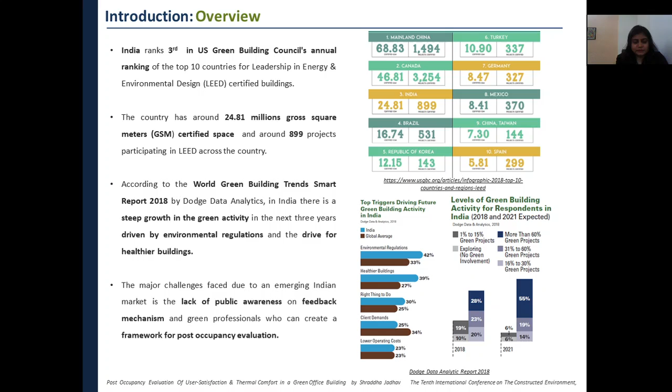across the country. According to World Green Building Trends SmartMarket Report 2018 by Dodge Data Analytics, it is seen that there will be a steep growth in green activity in the next coming 3 years in India, which will be driven by environmental regulations and drive for healthier buildings. The major challenges faced due to emerging Indian market is a lack of public awareness on feedback mechanism and green professionals who can create a framework for post-occupancy evaluation.

Coming to the introduction, post-occupancy evaluation. Post-occupancy evaluation is a process of systematically evaluating the performance of buildings after they have been built and occupied for at least 1 year. It is used to gauge fitness for the purpose and how a building is performing after construction from occupants' perspective. So, there are 3 levels of post-occupancy evaluation.

One is indicative level, and the time required is only 1 week, and it can be done through a quick walkthrough. Also, it can be done to just highlight the occupancy issues. The second is the investigative level. The time required is 1 to 3 months depending upon the level of assessment. It can be done through qualitative and quantitative based approach.

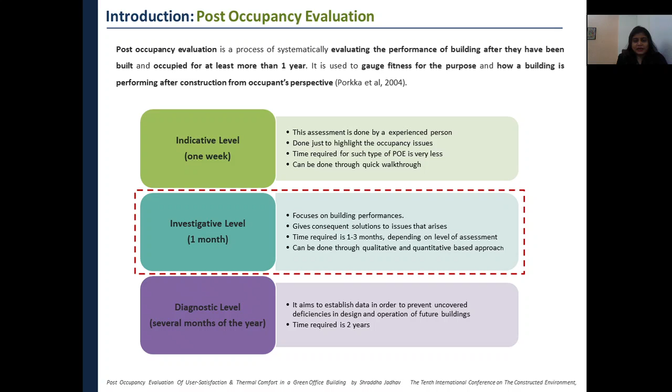The third is the diagnostic level. The time required is 2 years and it aims at establishing data in order to prevent uncovered deficiencies in design and operation of future buildings. The investigative level was followed for this research. The time taken was around 3 months and a qualitative and quantitative based approach was followed.

Coming to project case study. The project case study is an IT campus located in Pune city, which is 150 kilometers from Mumbai in India. The IT campus is located far away from the main highway at an extreme end. It has hills on the north and the northeast side and open area on the south side. The complex is divided into the following areas: development block, training center, ERC guest house, cafeteria, clubhouse and amphitheater.

Post-occupancy evaluation was done for the development block building only. The building analyzed is a LEED India EBOM Platinum rated office building, and it consists of 14 floors and has workstations and service areas. All the floors are typical, only breakout spaces on alternate floors are different. Alternate floors are different.

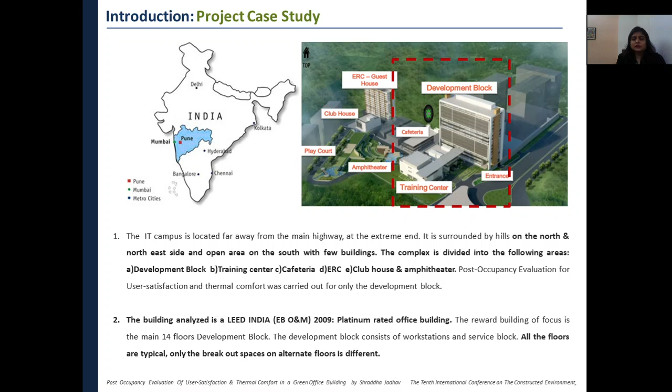Coming to methodology, tools for measurement and evaluation. The tools for measurement were digital meter tool, which was used to measure temperature, wind speed and daylight values on site. The globe thermometer tool was used to measure the mean radiant temperature on site.

Tool for evaluation. CBE thermal comfort tool was used to evaluate the PMV and PPD levels. SPSS analytics software was used to analyze the qualitative parameters. PMV range scale was used to understand the PMV in that space. And vertical temperature difference, operative temperature and percentage of dissatisfied due to local discomfort was followed from ASHRAE 55 2010.

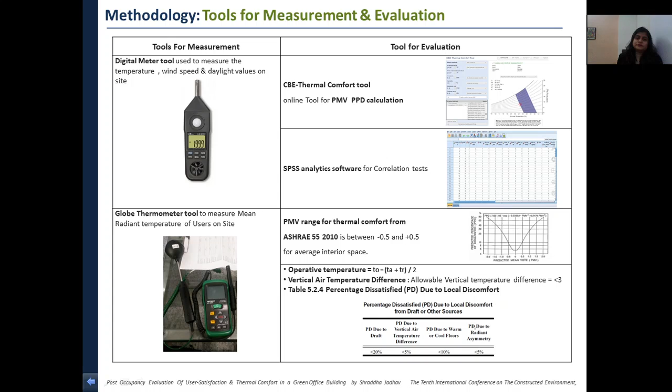Coming to sampling techniques and detail. Sampling was done such that there were some restrictive issues in the building since it was an IT building. So the building was divided into 3 levels, that is lower level, intermediate level and higher level. From the lower level, 2nd floor was selected. From the intermediate level, 6th floor was selected, and from the higher level, 11th floor was selected. The floor plate was typical on all the floors, only the breakout spaces were different.

So each floor plate was divided using stratified sampling based on orientation. So it was divided into ODC1, ODC2, ODC3 and ODC4. Random samples were selected from these ODCs, based on location: near to the window, between the desk and near to the dead external wall.

Sampling details. Survey questionnaires were distributed amongst these random samples in each ODC. Mean radiant temperature of these samples was measured for two timings, that is in the morning and the afternoon, at head and ankle level. Daylight levels were measured with the help of digital lux meter in these ODCs.

Research instruments and questionnaire survey. As mentioned earlier, research instruments were a digital meter tool, the survey questionnaires, and the observational survey. The survey questionnaire consisted of close-ended multiple choice questions limited to only one answer. In total, 100 samples were selected from all the three floors for analysis.

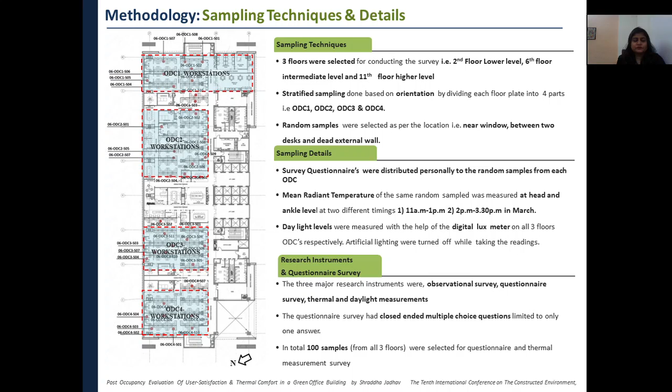Analysis of user building relationship. So, as you see in the chart, this pie chart tells about the space usage by occupants for breaks. So 30% of the occupants went to the breakout space on the floor level itself, 20% went to the landscape areas, 40% went to the cafeteria, and 10% went outside the building.

So if the breakout space in the building were designed in a better way, integrating with nature, then there was a probability that 50% of the occupants would have gone only in the building itself and would have avoided going outside the building. So the usage pattern helps us to understand how breakout spaces should be designed so that they are more integrated with nature, as these spaces enhance health and well-being and have an effect on the productivity of the occupants.

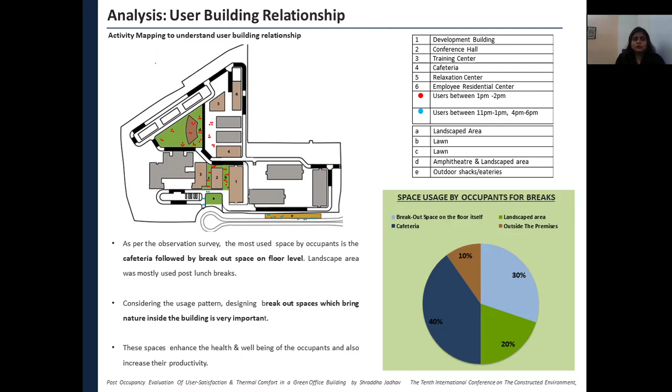Coming to user satisfaction, the survey questionnaire which was prepared had a section of parameters related to user satisfaction. The questions were asked on these parameters. So the first question was, how would you rate the daylight level in your workspace? The first parameter considered here was daylight. So 80% of the occupants said that the daylight levels are satisfying, whereas 20% said they are dissatisfied with the daylight levels.

So when the daylight levels were measured, it was seen that in the exterior areas near the exterior glazing on the north side, the daylight levels were more than 600, whereas in the interior core areas, the daylight level was within 100 to 200. So daylight levels majorly depend upon the building orientation and the window configuration.

So as seen in the floor, the interior core areas get less daylight because they have no exterior facade close by, and the building planning is done in such a way that only one side of the building gets more daylight. However, the occupants are satisfied with the daylight conditions, and the building could justify the requirements of daylight levels in the workspace. So the daylight levels are well as per the requirement.

Coming to the next question, that is artificial lighting around your workspace. 80% of the people were satisfied with the artificial lighting in their workspace, but a few were dissatisfied because of no user control on the artificial lighting in their space. The third is, how would you rate the overall interior design of your workspace? So around 40% of the people were satisfied, whereas 40 to 50% were dissatisfied with the interior design. The reason being the interior planning was a cubicle type pattern, and that created a physical barrier, thereby obstructing easy communication with colleagues.

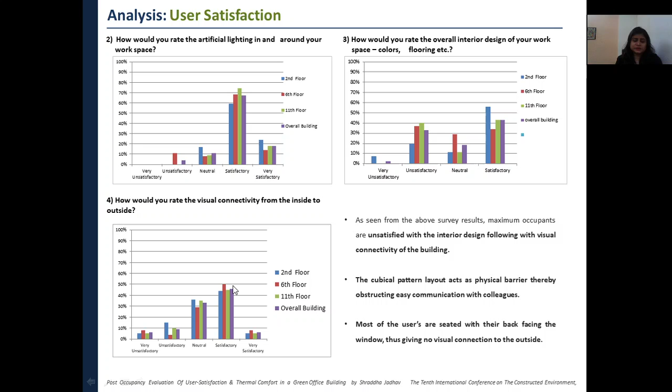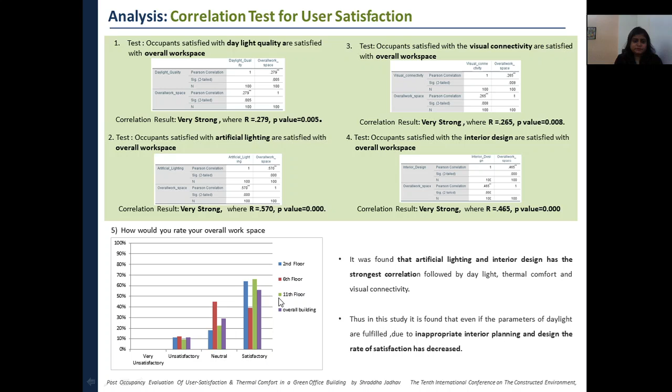Coming to correlation using user satisfaction. So the SPSS analytic tool was used to correlate the parameters with the objective, that is overall workspace satisfaction. It is seen that artificial lighting and interior design have the highest correlation, followed by daylight quality, thermal comfort, and visual connectivity. So in this study, it is found that even if the parameters of daylight are fulfilled, due to inappropriate interior planning and design, the rate of dissatisfaction has increased. So only 60% of the people were satisfied with their overall workspace in the building.

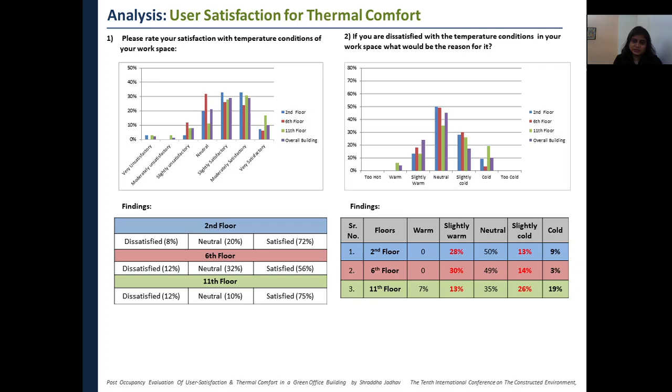Coming to the last question, if you feel discomfort, what is the most relevant type of discomfort in your workspace? Around 60% of the people feel that the lack of fresh air is the most relevant type of discomfort, followed by others. So these results were then compared with the field measurements which were taken in the next section.

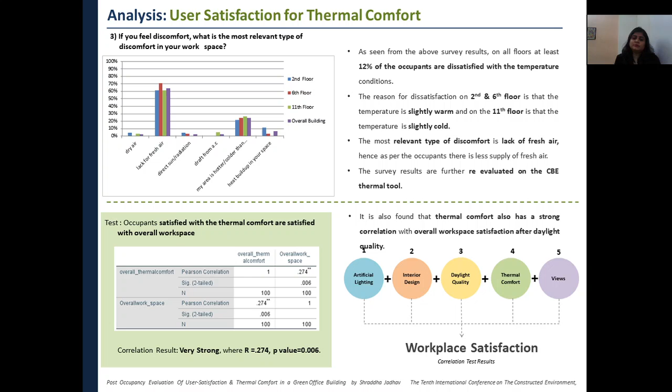So when the correlation was done for thermal comfort and overall workspace satisfaction, it also had a strong relationship. On the right side, it is shown in descending order how the different parameters are correlated with the objective, that is workspace satisfaction, and these should be given importance during planning and designing.

The airspeed, relative humidity, metabolic rate and clothing was done as per ASHRAE 55-2017, depending upon the activity in that area. After inputting this, we could achieve the PMV and the PPD of that area.

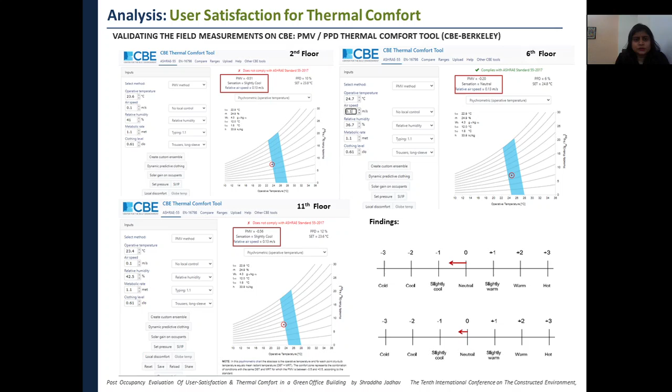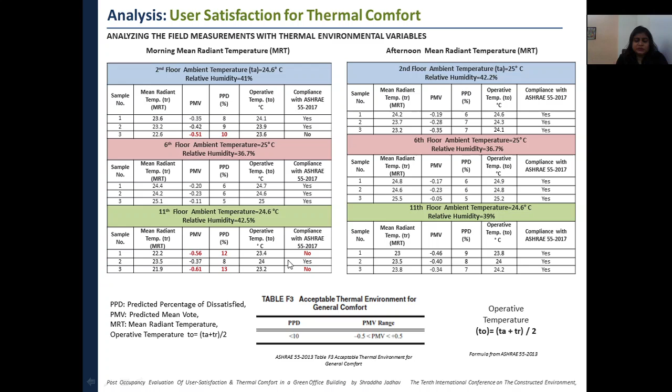So as you see, the PMV and PPD ranges on all the floors are within the acceptable limit, that is minus 0.5, except the 11th floor, and the PPD is also below 10%. So on an average, when the PPD was measured, it is coming below 10%. So it is found that there is a difference in the perceived thermal comfort and actual thermal comfort conditions.

As per CBE thermal comfort tool, the average PPD of dissatisfied is below 10% and PMV is between minus 0.61 to 0. ASHRAE 55-2017 states that the acceptable range of PPD is below 10% and PMV is minus 0.5 to plus 0.5, as I mentioned earlier.

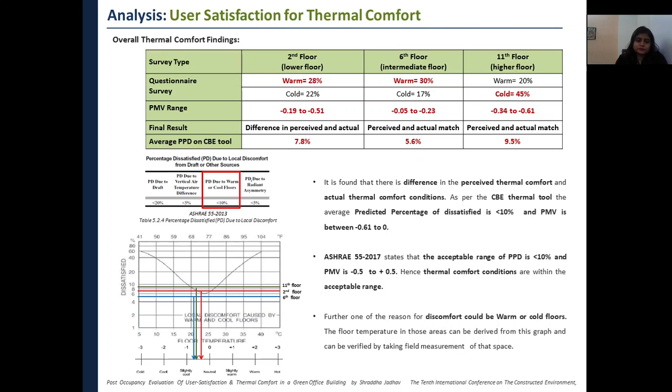Coming to discussion. From the above post-occupancy evaluation, it is found that 60% of the occupants are satisfied with the overall office space. I also went back and saw the survey which was taken during the LEED certification. That survey did not have any qualitative and quantitative related questions; there were only questions related to the maintenance and operations of the building. There was only one question related to thermal comfort and daylight. So the survey did not have well-structured questions at that time.

Whereas the survey questionnaire which was prepared during the post-occupancy evaluation had a separate section for user satisfaction and a separate section for thermal comfort. So all the parameters were considered during the questionnaire survey. Also, the field measurement survey helped to find out the exact reason for thermal comfort dissatisfaction.

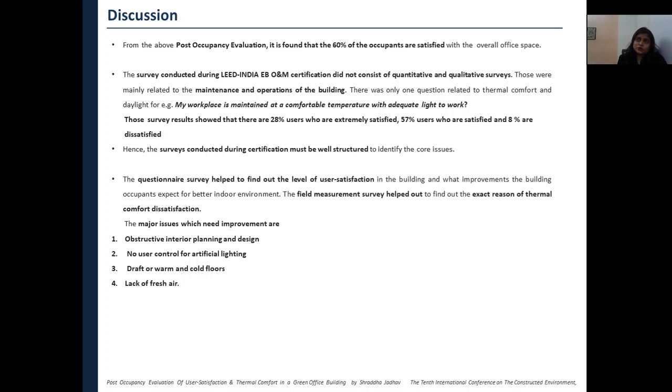After comparing the survey results with the field measurements, the major issues which need improvements in this building are the obstructive interior planning and designing, no user control for artificial lighting, draft or warm or cold floors, and lack of fresh air.

So the conclusion here is the results show that even if the building is a LEED India EB O&M Platinum rated building, the building occupants are not satisfied in their workspace. The satisfaction level is less than 80%. So there are a few suggestions which I would like to give to the facility team, management team, or to the green building consultant.

The green building consultant should prepare a post-occupancy plan for the facility management team to follow at operational stage. This survey must be conducted every 6 months after the building has been fully occupied and operational for at least 1 year. The building facility management team must be trained to carry out these surveys. The rating system must include a building audit and post-occupancy for a period of at least 3 years to ensure that the building is operated as expected in the design stage.

The building facility management team, with the help of the green building consultant, must approach LEED Arc and implement live monitoring of all parameters. All the qualitative and quantitative results must be compared to arrive at a conclusive result. A database of these POE results must be shared with all stakeholders for future reference.

This database must be cloud-based and accessible to relevant stakeholders on permission for future buildings. This database helps a developer or other stakeholders to understand what parameters are important and what parameters must be considered for relatable future projects.

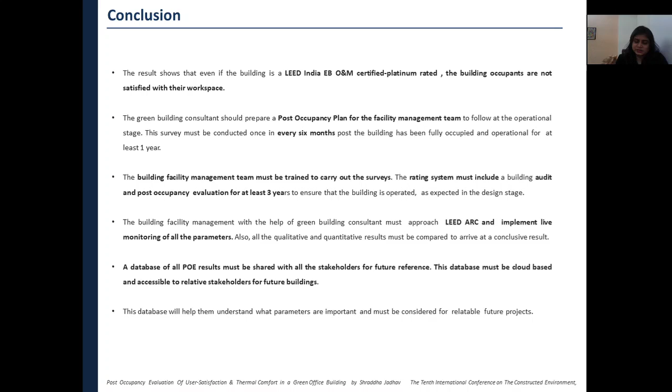I hope this research has helped everyone to understand how a post-occupancy evaluation is carried out, which parameters should be considered while designing a building, and how they play a role in the user satisfaction levels. So I just hope that we continue building holistic buildings in the future.